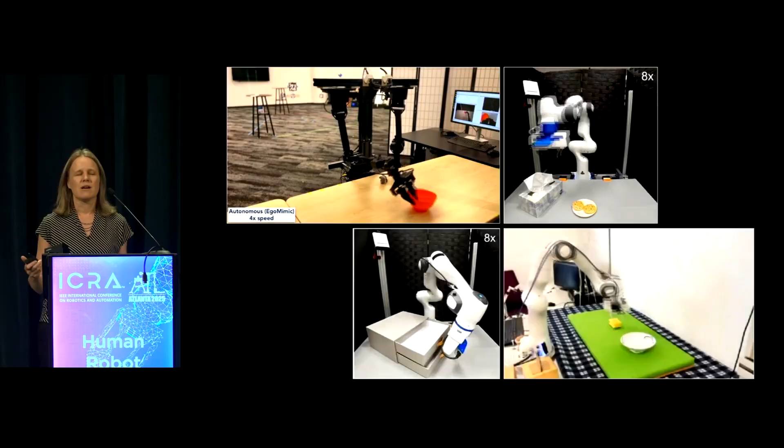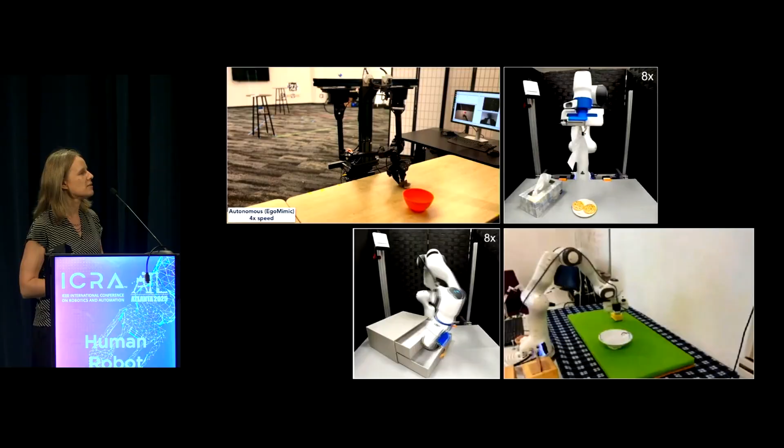As we've seen through many talks at ICRA and other conferences, robot learning has gotten more and more advanced over the last few years. Robots are able to pick up objects, open drawers, and execute short plans following language commands better than they could in previous years. And all these fundamental abilities for robotic systems mean that we can now take a step back.

What I want you to do with me is imagine what it looks like when we put these robots in our homes. If somebody is living at home alone right now, and one day they get a robot, what does that interaction look like? What does the robot do? Obviously, if the user says, get me a bottle of water, the robot should go follow that command. But what does the robot do when the user's asleep, when they're out of the house, when they're getting ready for their day? Does the robot just stand there waiting for the next verbal command, or does it actually do something?

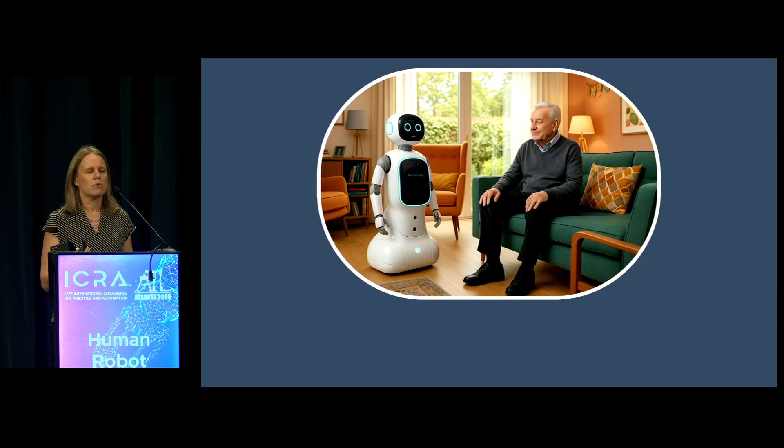That brings us to this really important point: as we envision these autonomous systems, we imagine proactivity. We imagine these robots anticipating our needs and doing something without constantly being told what to do. So that's the keynote I want to talk about today: what does it look like when we develop proactive systems? I want to talk about things we've figured out in the last few years and things that are still open problems.

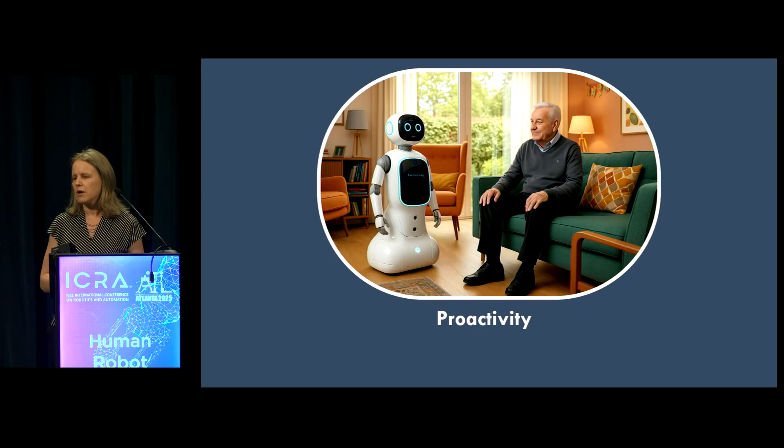I'll try to touch on open problems, especially for students in the audience, because there are so many things we could continue to explore in this area. As we touch on proactivity, think about robots taking initiative and doing things in your own home. You might also start to question their behavior.

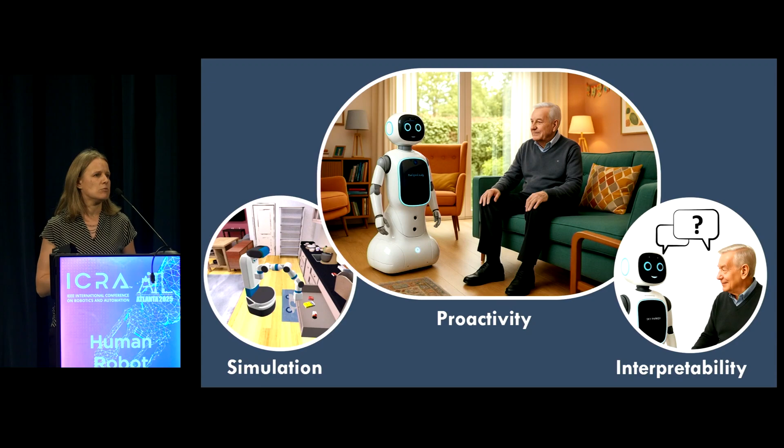And so this really brings a spotlight onto interpretability and explainability of robot behavior. That's another topic I want to touch on. Last but not least, I want to talk about simulation, which is kind of in the background, the driving force behind all of this research. So these are the three things I want to talk about. I'll talk about things that work, some things that don't work, and some open challenges, things we don't yet know.

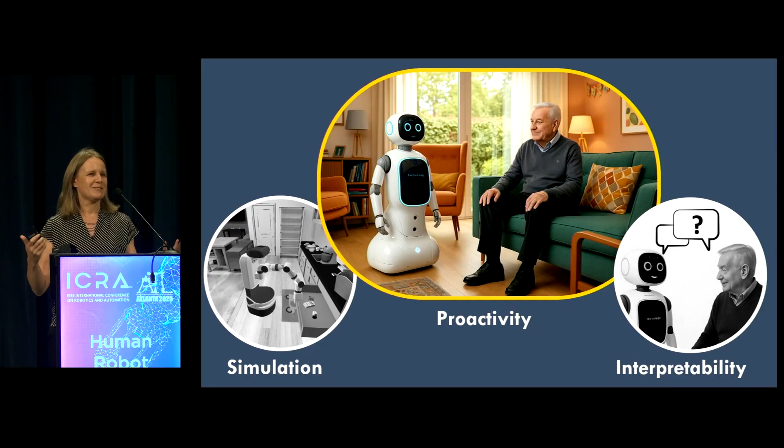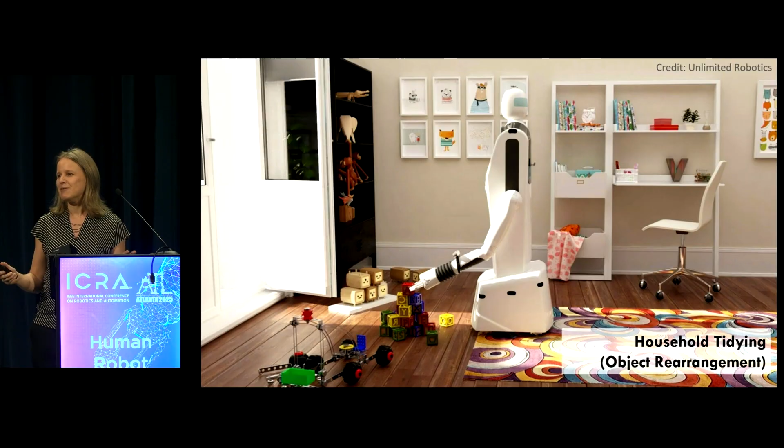And I'll start with proactivity. If we imagine robots in our home doing things we didn't necessarily ask them to do, one of the first things we think of is cleaning our house. We want robots - everyone wants a robot to clean their house for them, right? Every single one of us would like that pretty much. And so this, in AI, is known as the object rearrangement problem.

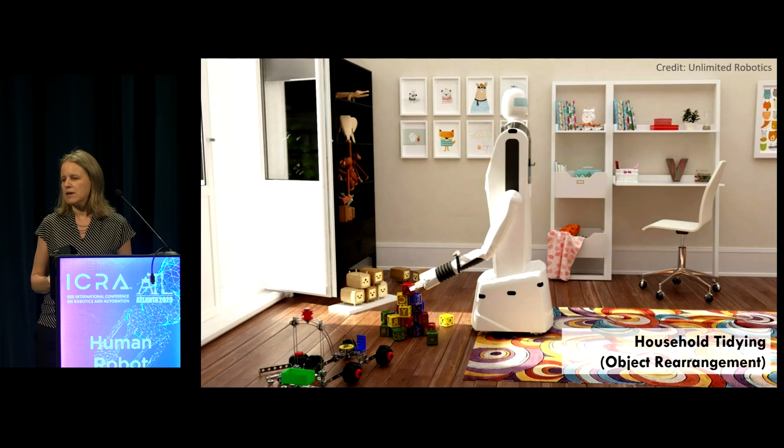The issue is, you have an environment, you have a new object, and you need to know where the robot should place it. This has been a really active area of work for the last 5-6 years, with a lot of great advances. I'm going to give a quick overview of where we are in some of that work, and not all of this that I'm mentioning is ours. But what I want to convey is the high-level view, which is that we can characterize approaches roughly into are they LLM-based or not LLM-based.

What we're seeing is that with the advent of LLM-based technologies, the performance and accuracy of placing an object has gotten a lot better, because LLMs embed within them so much semantic knowledge about our human lives that we now have models that for free enable us to place objects better than we could before. And another added benefit is that users actually like the placements we get from these LLM-based models even better. So this is great.

Let me give you an overview of how you'd use an LLM for something like this. We're no longer talking to the robot here - the robot's being proactive. What it does is drive around your house, observe over time some examples of how you like to organize things in a personalized way. Here we're using text descriptions to capture a description of each scene, to aggregate those into summaries or rules about how that particular individual likes their house arranged, so that when the robot faces a new object it needs to place, it's able to reconcile the difference between the current environment and those rules in order to place that object.

So this is a quick overview of where we are on object rearrangement. Obviously, there's a whole family of techniques with different characterizations within this space. But this gives us a first taste of proactivity, because now the robot's not picking up each object based on our language, it's doing that on its own. Here we're only considering one thing though, which is: I have an object, where do I put it? And that 'where' is really important, but we also want to consider other aspects, such as when and what the user is doing.

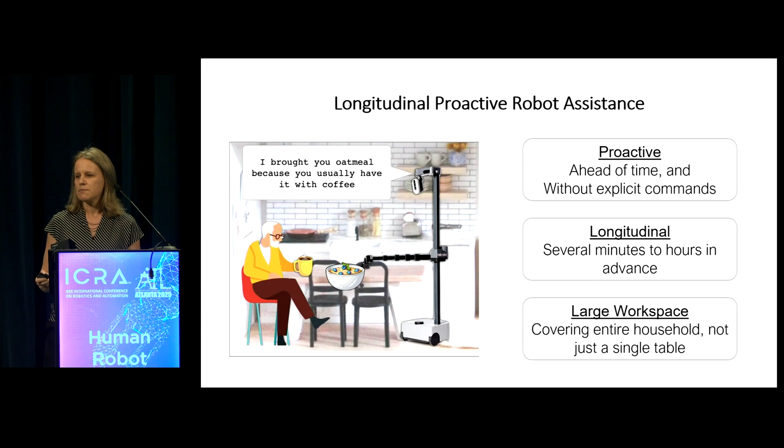There's many ways you can think about how the robot makes these decisions about what to do and when, and what information it bases those decisions on. For example, we can build models that consider the current state of the environment and the current time of day. Based on observations, it can say, okay, normally at this time of day you bring out the oatmeal, so I will do that for you. And such simple models already work, actually surprisingly well to me, but not nearly quite well enough. And so we can add more.

We can feed more information to these models. You can model these as graph neural networks, for example, and incorporate past history of what's been going on at home. If you have activity recognition on your robot, you can incorporate that as well. With each new source of information, you can build more and more complex but very personalized models, tailored to a particular routine and habit of a user to get better proactivity.

Getting to 100% proactivity is really hard because we're humans, we're messy, sometimes we skip breakfast and we're rushing out the door. So 100% prediction of what people want to do is really, really hard. But I'll try to come back to that in simulation.

There's a lot more we could talk about proactivity. For the sake of time, I'm going to move on, but I want to mention one last thing: as we start to get robots out into the real world and have them do proactive behaviors, we learn there's a lot of opinions that happen from users. People say, oh, I like that, or, oh, I really didn't like that. I thought I would want it folding my laundry, and I do, but maybe not when I'm right next to it because that makes me uncomfortable.

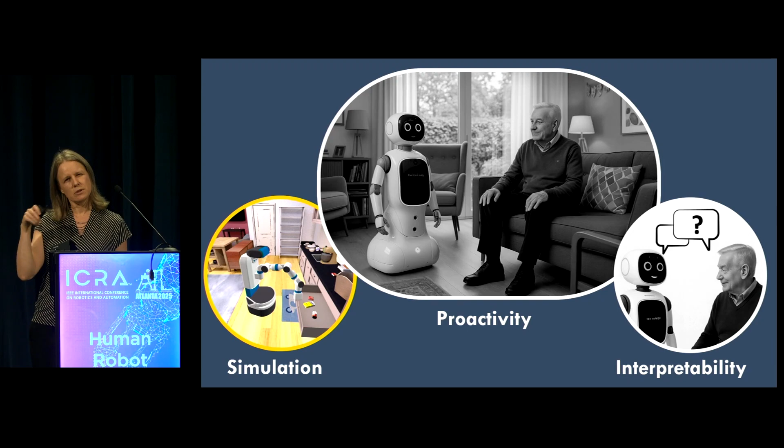What I do want to jump to is simulation as the underlying building block upon which all of this is based. Now, simulation is great. We all love simulators. We know the value of simulators. They're very safe. It's easy and cheap to get data. We can train all kinds of models, right? The caveat is that there's no perfect simulator. And every simulator has little bugs and nuances, and AI models and machine learning models learn to cheat and take advantage of them.

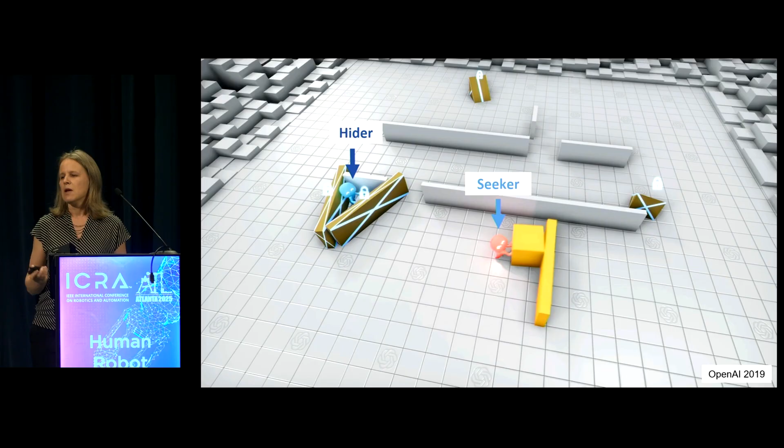So here's one example. It's quite famous. This is from OpenAI 2019, hide and seek, if you haven't seen it. So we have a hider hiding behind these walls. We have a seeker who can't get over these walls. So the hider should be winning this game of hide and seek. But watch what happens with the seeker. What it does is it takes this block over here, it climbs on, and by walking on the box moves. That's not how physics works. This is a bug in the simulator. But the RL algorithm has learned to exploit it.

Will this work in the real world? No, thank you, right? So the seeker is going to win here. This is not good sim-to-real transfer. And this is not the only example. Victoria Krakovna at DeepMind keeps a list of all the times in published work that this happens, and it's a very, very long list.

So the question is, how can we continue to train robots in HRI and elsewhere on these imperfect simulators while ensuring that our performance actually works in the real world? And I want to bring this back to HRI because we're really looking at interactive systems.